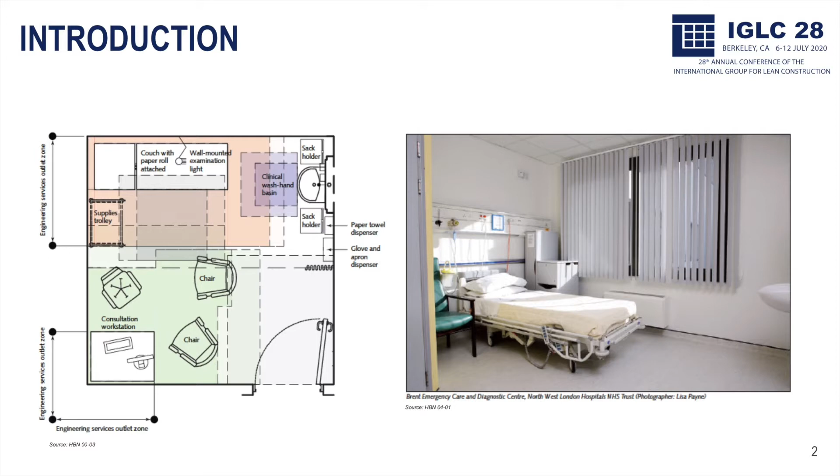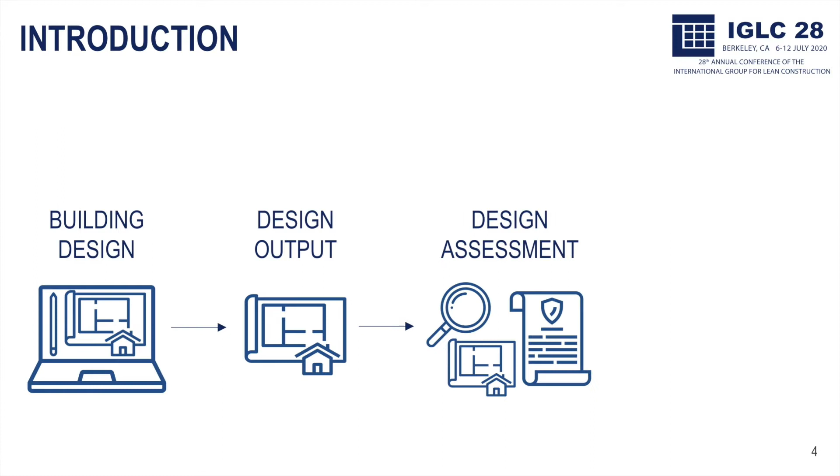The regulatory assessment process observed in practice follows a recurrent set of steps. The building is designed, and its assessment is typically done based on design outputs, even if this represents a preliminary design stage. Non-compliances are then identified, and they either lead to redesign so they can be fixed, or to a derogation process, in which non-compliances shall be justified based on a set of criteria.

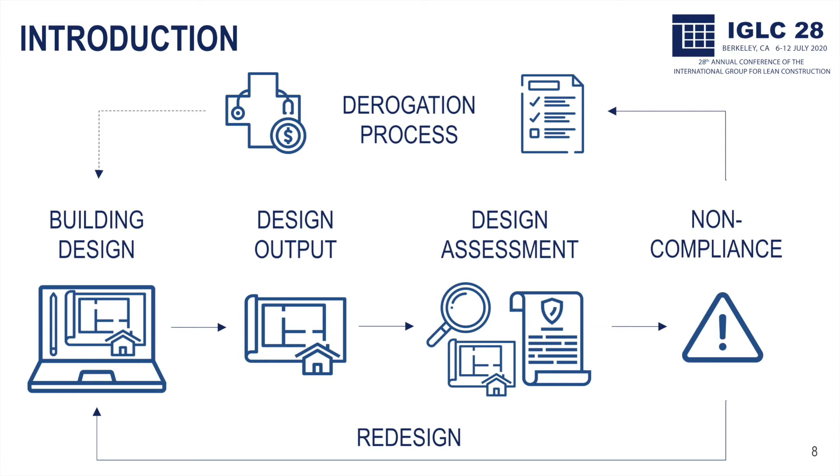This eventually also results in redesign and further implications on the project budget and increasing delays, which can lead to a negative health cost. Design outputs are typically obtained at the end of design stages. Design assessment is understood in practice as an independent and isolated process from the overall design. Non-compliances are only identified at late design stages.

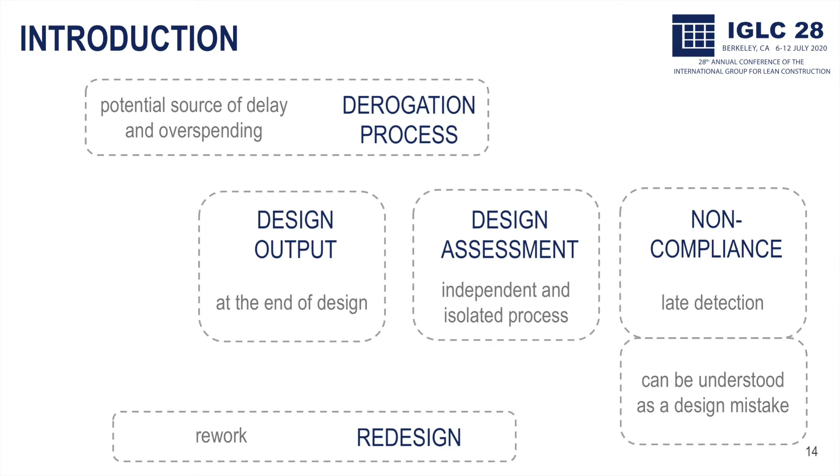Redesign clearly represents rework, and the derogation process increases uncertainties, being a source of potential delays and overspendings. Hence, non-compliances represent mistakes in design, which should be ideally avoided, or at least their impacts mitigated. Automation can help in streamlining this process, and in fact, its use focused on design assessment has been a topic of research for many years.

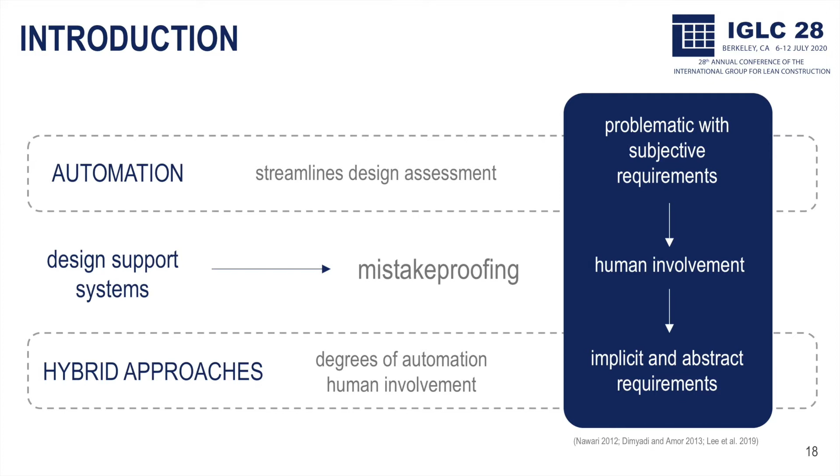The main issue still identified in practice is related to dealing with subjective requirements, which depend on human involvement due to implicit and abstract information. In this sense, the use of hybrid approaches appears to be suitable, enabling the use of degrees of automation mixed with human operations. In the context of this investigation, this is understood as design support systems, and mistake-proofing could benefit this process by helping to promote an approach focused on avoiding design mistakes rather than searching for mistakes after they are made.

The aim of this paper is to explore from a theoretical perspective how existing technologies support mistake-proofing in healthcare design. This paper is part of a PhD research project that follows the design science research approach. It does not present the artifact of this research on its own, but it consists of preliminary findings based on theoretical evidence from literature. The contents of this paper have been also partially informed by empirical data from a study undertaken in collaboration with an institution responsible for primary healthcare buildings across England.

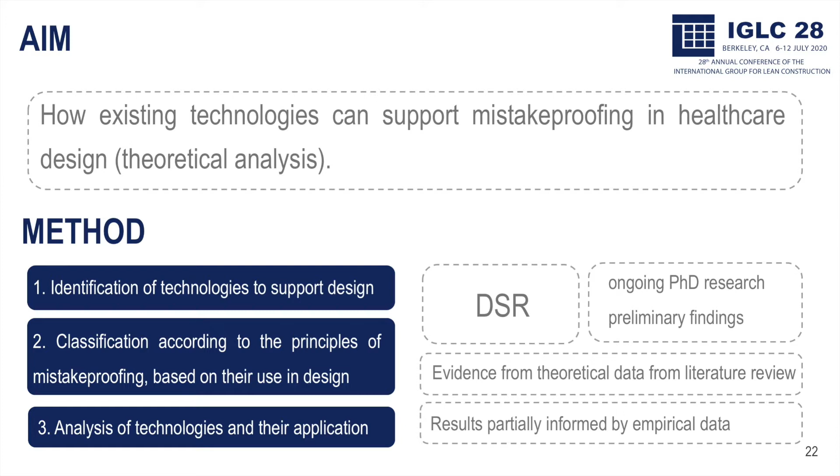The main steps of this investigation are related to identifying technologies to support healthcare building design, classifying these strategies according to the principles of mistake-proofing, and later analyzing their application. Mistakes should be prevented from manifesting at all, or if this is not possible, their impacts should be minimized after a mistake happens. This is the main reasoning underlying the 6 principles of mistake-proofing, which will be explored during this presentation. This classification is originally based on Shingo's ideas and has recently been also explored by Tommelein in the last IGLC in Ireland.

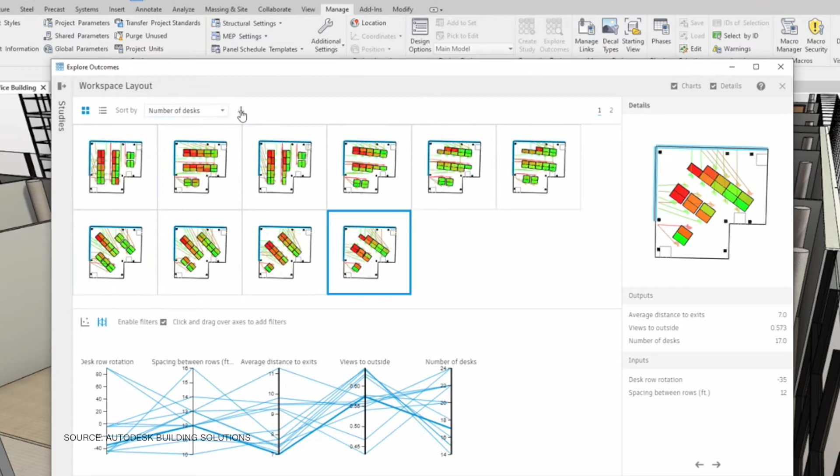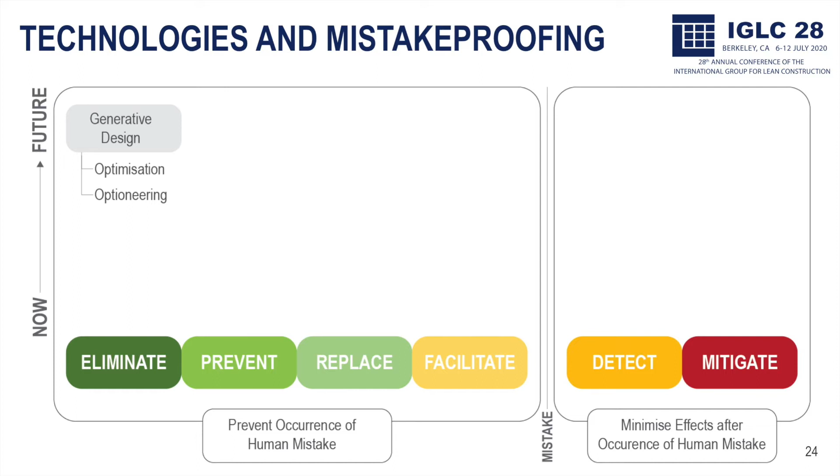We start with generative design, which is based on using artificial intelligence towards either optimization or optioneering. Design optimization aims to indicate the most suitable solution by solving problems with multiple variables and disciplines. Design optioneering, on the other hand, takes advantage of such algorithms to generate multiple design alternatives. These approaches could support mistake-proofing by eliminating the possibility of error, where human designers were to solve the same problems alone. For example, sorting the layout of floor plans based on constraint requirements of area and spatial adjacencies.

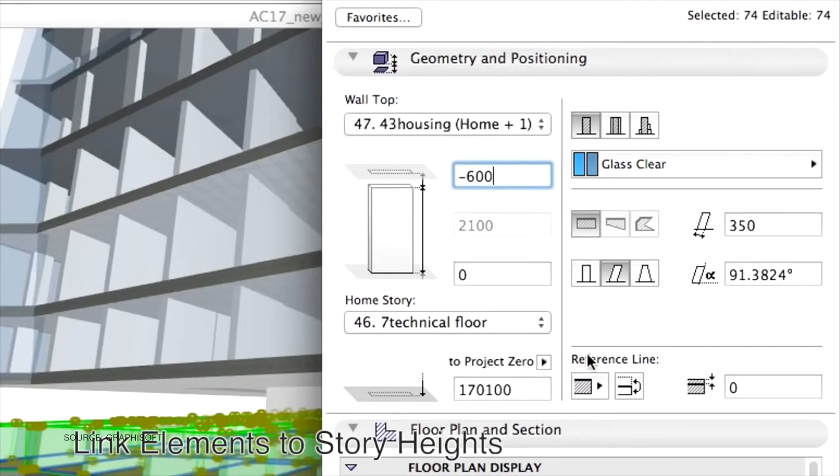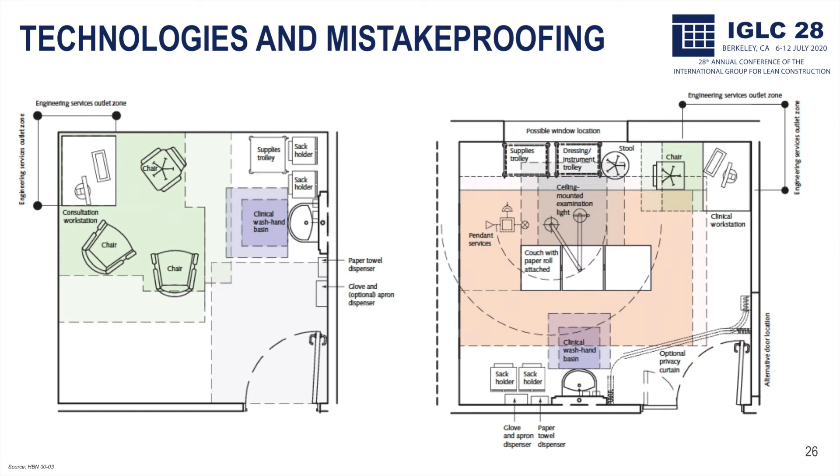Parametric modeling could prevent the occurrence of errors by applying constraints and object spatial boundaries. Constraints are already used to support modeling operations in current software, reflecting relationships between objects according to real limitations. Object spatial boundaries are related to the space required by objects in use, corresponding to their projection and associated space for maneuver. The use of parametric modeling could be further expanded towards embedding information from the regulatory framework into object families and building models.

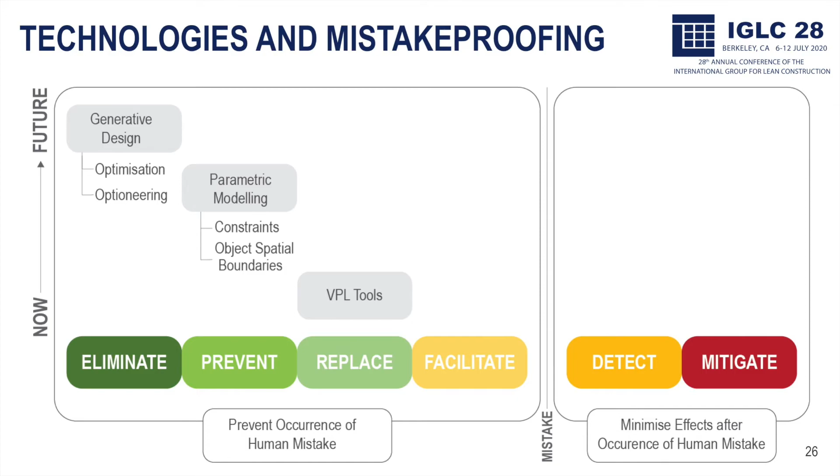Moving to visual programming language tools such as Dynamo or Grasshopper, which could replace operations in a design process typically done by humans. The use of VPL tools can be associated to error-prone activities related to repetitive operations, for example, including the same object many times in the building model and adapting different elements within the building model according to fixed parameters and constraints.

Warnings and alerts could incorporate mistake-proofing in a design process under two principles: facilitation, by visually flagging potential mistakes before they are made, or detection, promptly informing designers right after any mistake is detected.

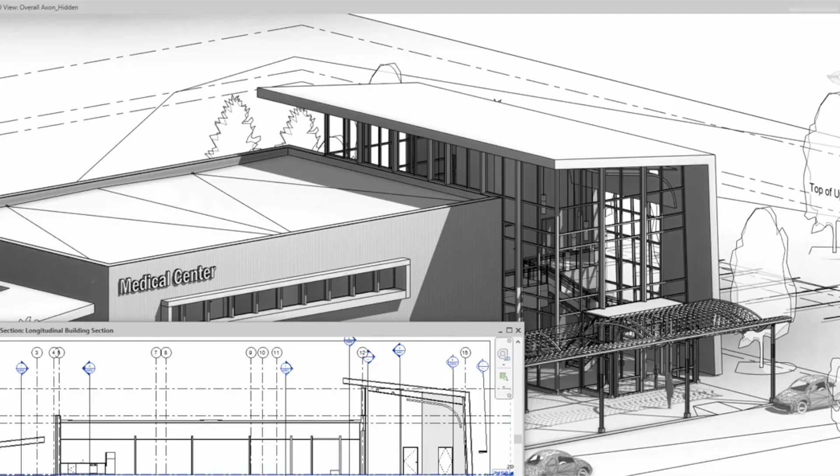They also could force a complete stop in the design process by introducing compulsory constraints in the software, so errors could be corrected before advancing further. This is at the core of mistake proofing.

Immersive approaches such as virtual and augmented reality could be adopted to facilitate designers' work, but also to support quick detection of mistakes. They enable evidencing contextual information about both the product and the associated process. They could provide an immersive environment, supporting human designers to better perform their operations in all stages of the design.

A design assistant could facilitate the design process. It is envisioned as a constant guide, informing designers on their decision-making based on information from the regulatory framework. It should provide the right information at the exact time designers need to use it, by suggesting where, how, and why elements should be inserted during design.

Moreover, the design assistant could track decision-making by also recording where its evidence or knowledge was needed and how it influenced and modified the design, promoting continuous improvement. It could provide a platform for continuous learning from potential mistakes, improving design by also informing designers about what could have gone wrong.

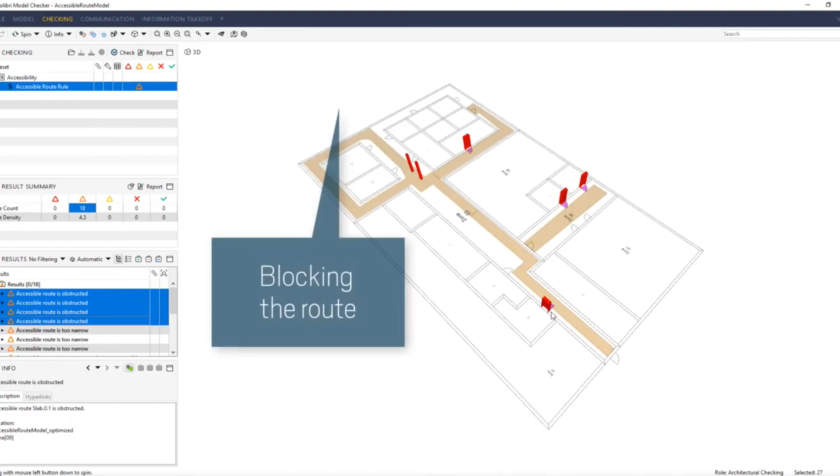In situations where automated rule-checking techniques are used, they relate to the lowest levels of mistake proofing, in which errors and inconsistencies have already happened. If the use is at the end of design stages under an isolated and non-repetitive approach, it relates to the mitigation principle. On the other hand, if they are incorporated to design at different stages and performed in an iterative and continuous way, they reflect the detection principle.

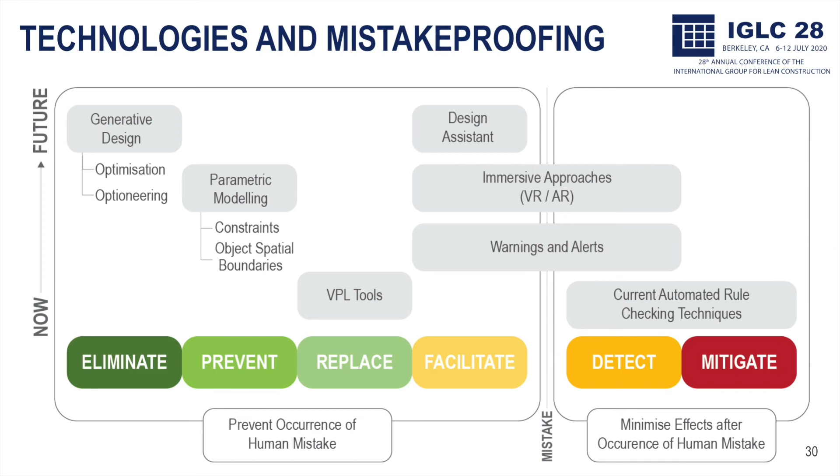In current uses of automated rule checking, building models need to be exported from the native software to other applications under different file formats. This can eventually result in another error-prone situation due to missing information and conflicting files. In healthcare design, these strategies could support reducing the occurrence of non-compliances in the late stages of design. In fact, their practical adoption could reduce and potentially eliminate derogations from this process.

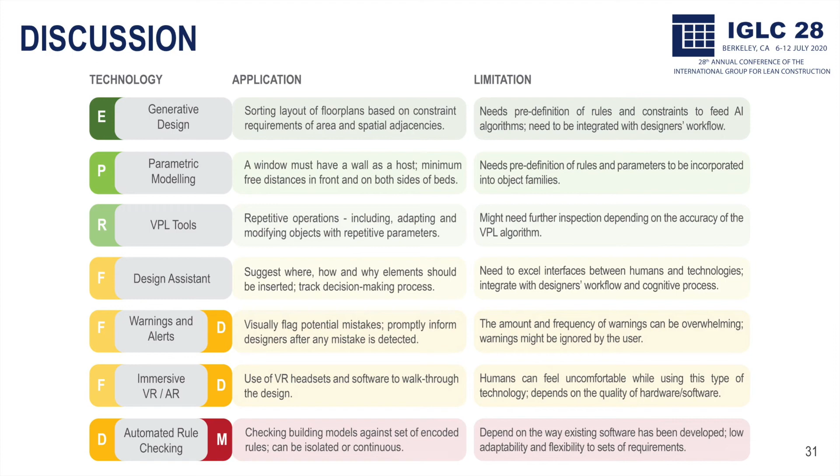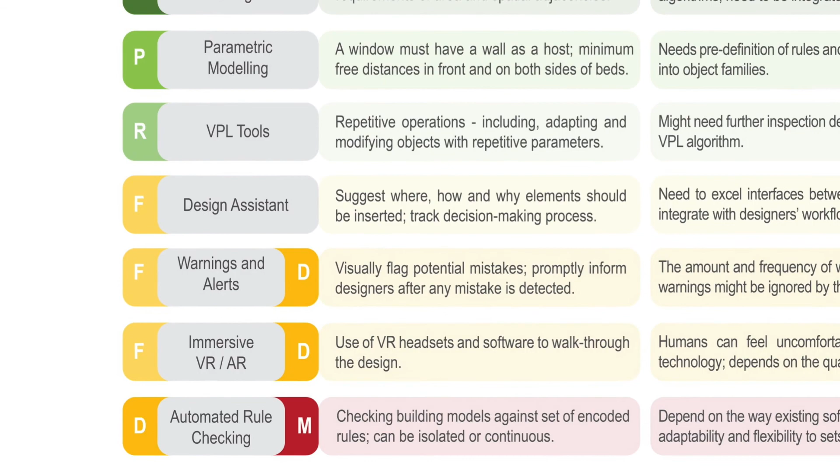Most of the time, their application, as discussed, represents an ideal situation. There are many limitations related to the way they could be incorporated into design operations, which still demand further exploration in practice. In design, mistake-proofing strategies often don't fit exclusively into one principle. This is due to the different ways the same technology could be used, according to different factors such as context, workflow, and the unique reasoning of every designer.

It can also be difficult to determine what is a mistake in design and what is the relationship between mistakes and rework in this process. Differently from production, design is based on iterative and complex operations. Much of the potential rework can actually be the source of emergent and creative solutions. This understanding suggests that mistake proofing can assume different perspectives within the production and design domains.

Mistake proofing is a key element in Lean. The technologies discussed in this paper explore jidoka in design. At the same time, they address key issues around requirement subjectivity from the automated rule-checking research.

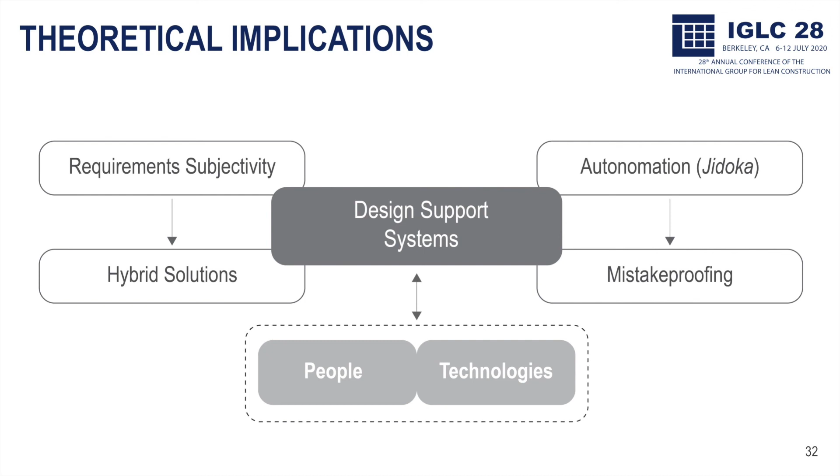This theoretical framework demonstrates how design support systems can work as a convergent point between Lean and the issue around requirement subjectivity. It can be understood as a synergetic element between the subjectivity embedded in the regulatory framework, potentially addressed through hybrid solutions, and jidoka through mistake proofing. In both streams, this synergy relies on the interaction between humans and technologies.

By presenting technologies and identifying their characteristics, benefits, limitations, and applications, there is a potential feasibility of using mistake proofing within the design domain. Our exploration of mistake proofing in design was conducted under a theoretical perspective. Thus, technologies have not been applied and validated in design practice, which represents a limitation and an indication for future research.

The extent of this investigation can be explored even further with its practical application, for example to making do, because of the complexity of regulatory documents. Future impacts of mistake proofing in design can be even greater when we also incorporate different types of requirements, such as the needs from clients and other stakeholders. Findings from this study suggest that exploring mistake proofing in the design domain relies on better understanding the relationship between human designers and technologies and how they are enablers of one another.